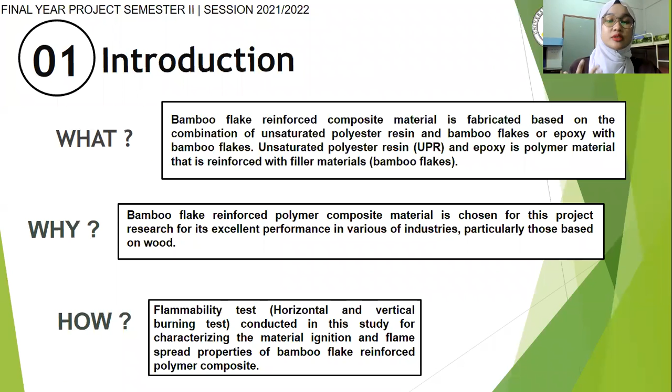Next is the problem statement. There is limited previous study as past researchers focused more on the mechanical property of this composite rather than the fire property. The second reason is to improve existing products such as oriented strand board, and for future work so that this study will become beneficial for other researchers.

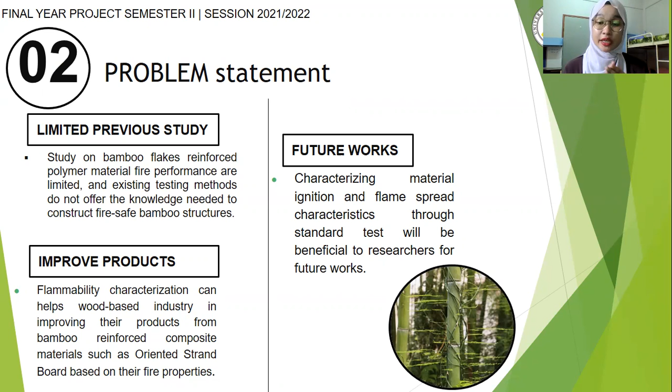Next, the objective. The main objective of this study is to characterize the bamboo flake reinforced polymer composite material ignition and flame spread property. This main objective is specified into three objectives: to design an experiment for characterizing the material ignition and flame spread property with ISO 3795 and American Standard Testing D635 as a reference.

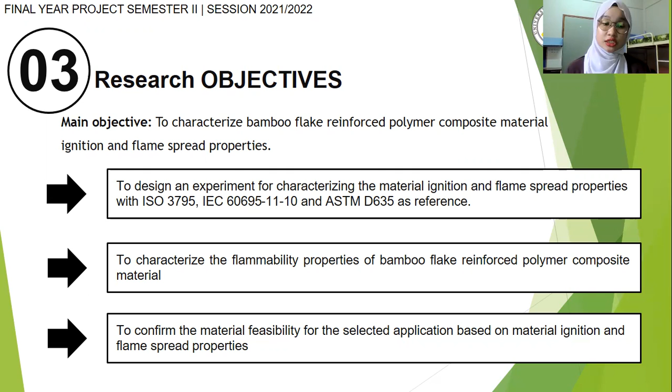The second objective is to characterize the flammability property of this bamboo flake reinforced polymer composite material. The third is to confirm the material feasibility for the selected application based on the material ignition and flame spread property.

Examples of results obtained from UL94 tests are flaming drops, combustion time, and combustion rate. From literature review we can also get the LOI value of UPR and epoxy. For UPR it is 21%, and for epoxy it is 20.2%.

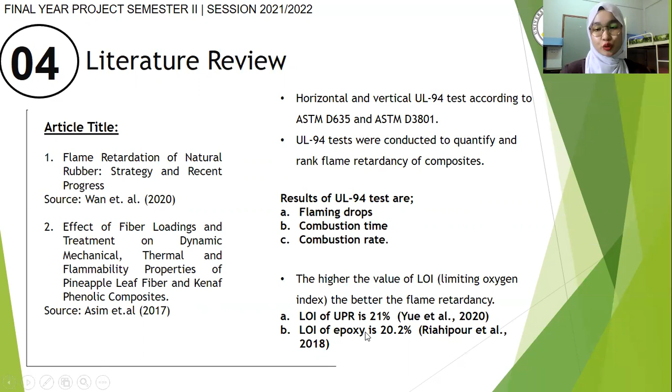ASTM D635 is the standard test method for determining the rate of burning and duration of burning for polymeric materials. ASTM D3801 presents a small-scale laboratory test utilizing a 20mm flame to determine the comparative burning characteristics of plastic materials.

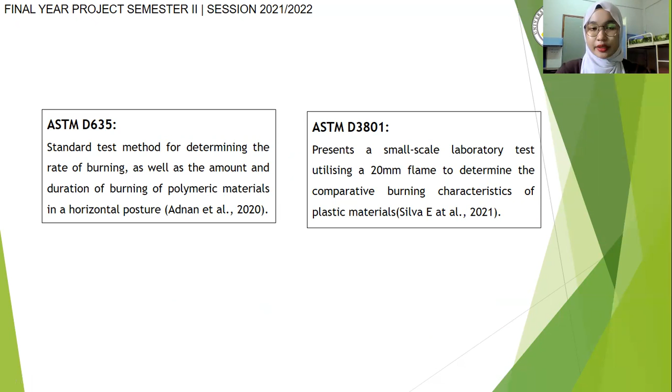Next is the methodology of the study. The study will start with specimen preparation of 5 different materials, which include composite materials such as UPR reinforced with bamboo flake and epoxy reinforced with bamboo flake.

As for the polymer materials, these are the pure matrix, polyester resin and epoxy resin. The fifth material is pure bamboo. After completing the specimen preparation, I will proceed to instrument preparation followed by flammability tests, horizontal and vertical burning tests. Once results such as ignition and flame spread are obtained, I will proceed to the next step.

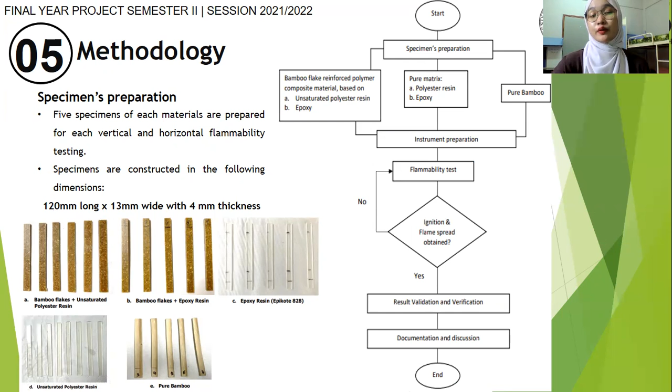This shows the 5 materials prepared with a dimension of 120mm long, 13mm wide, and 4mm thick. Next is the flammability test, which is designed and performed based on the American Standard Testing Method D635, ISO 3795, and UL94 standard.

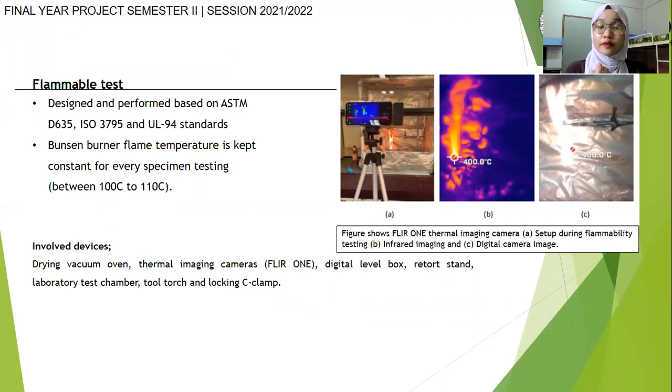The picture shows the FLIR ONE thermal imaging camera. A is the setup during flammability testing, B is the infrared imaging, and C is the digital camera image. The involved devices include a drying vacuum oven, FLIR ONE, digital level box, and more.

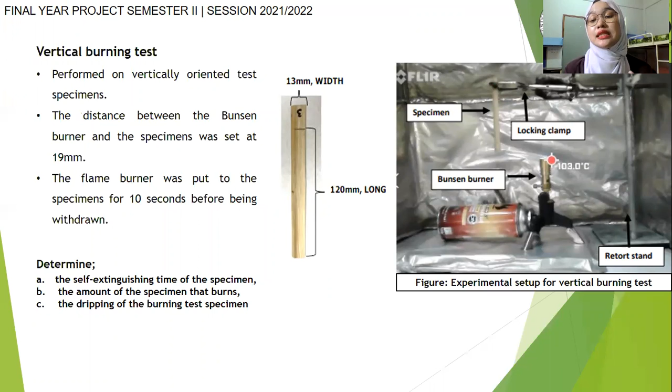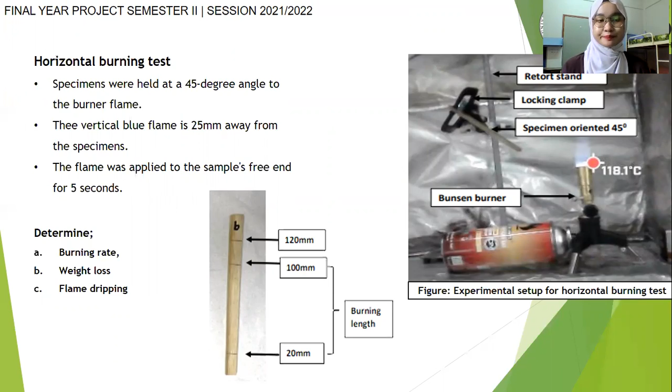As for the horizontal burning test, it is different: the specimen is held at a 45-degree angle to the burner flame, with the distance between the Bunsen burner and the specimen also 25mm away, and the flame applied to the specimen for only 5 seconds. The data collected through horizontal burning tests include burning rate, weight loss, and flame dripping. Next is result validation and verification.

As you can see here, for both vertical and horizontal burning tests for composite material UPR with bamboo flake, for the validation, COV is calculated for both flame time and burning rate. As for the verification, result verification is done through a comparison between the 5 different materials.

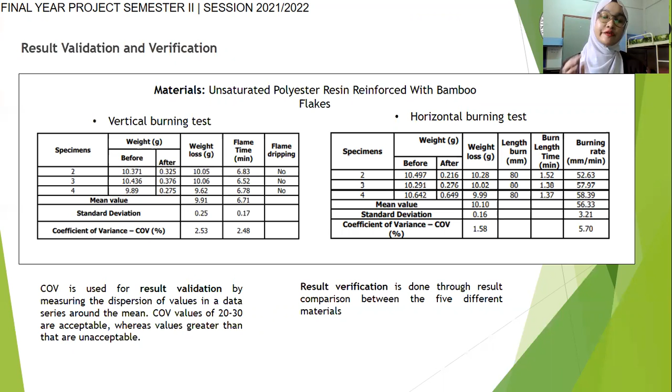Okay, next is the result and discussion.

Here shows the temperature profile during a vertical burning test of all 5 materials, which include epoxy, UPR, pure bamboo, bamboo flake with epoxy, and bamboo flake with UPR. As you can see, the temperature of both composite materials falls over time, and both composites have a lower temperature change over time. As for epoxy resin, when exposed to heat, because epoxy is made of BPA and epichlorohydrin, the epichlorohydrin will polymerize aggressively and quickly, resulting in a faster flame time of epoxy resin. As for UPR, it will release a substantial number of pyrolysis products when it's burned.

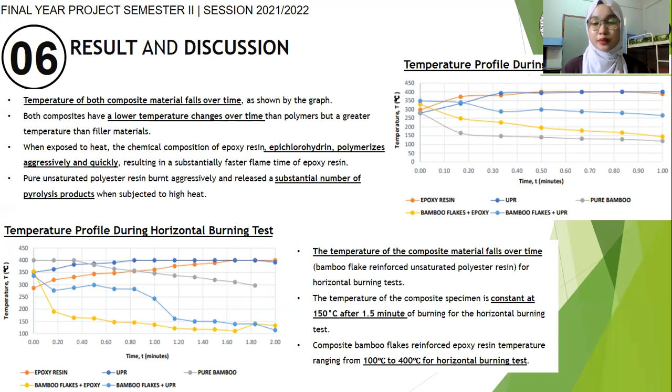Next, this is the flame behavior for composite material, which is bamboo flake with epoxy or bamboo flake with UPR for vertical burning test. As you can see, shown in the table is the early flame time of both composite materials and the temperature after 1 and 2 minutes of burning. Both composites show a decline in temperature over time, and neither of them show a melt pouring behavior when burned.

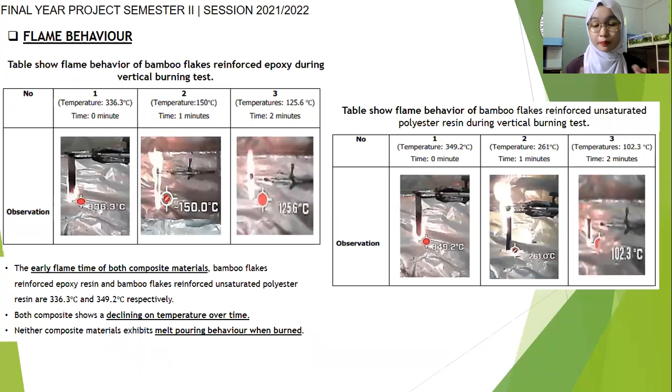Next, this is the flame behavior of polymer material, which is epoxy and UPR. The flame spread for epoxy resin travels slower than UPR, however both show a melt dripping behavior. As for UPR, the reason for its melt dripping behavior is because of polyester. The polyester in the UPR is heat sensitive, that is, when it experiences heat, it will melt, shrink, and deform. Melt dripping behavior is harmful in a fire as it will lead to secondary igniting.

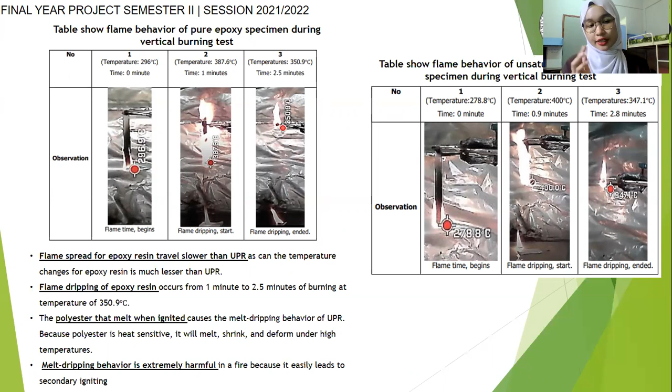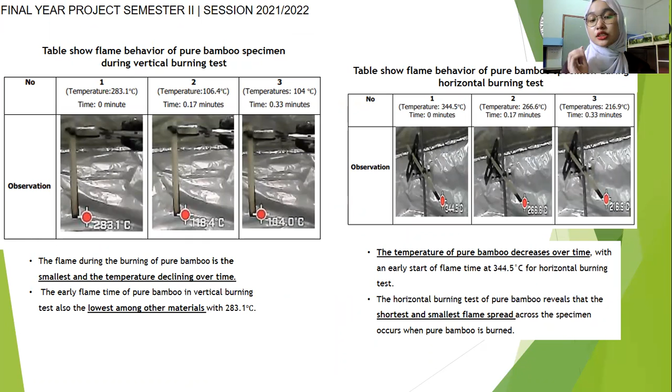Next, this is the pure bamboo flame behavior in vertical and horizontal burning tests. As you can see, in both tests, the flame time of pure bamboo is the lowest among the materials, and it also revealed that pure bamboo has the shortest and smallest flame spread.

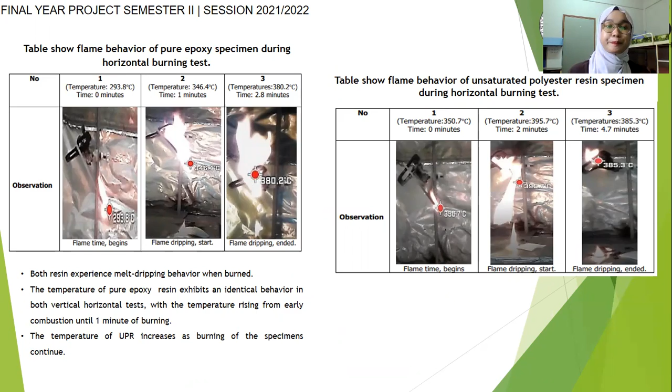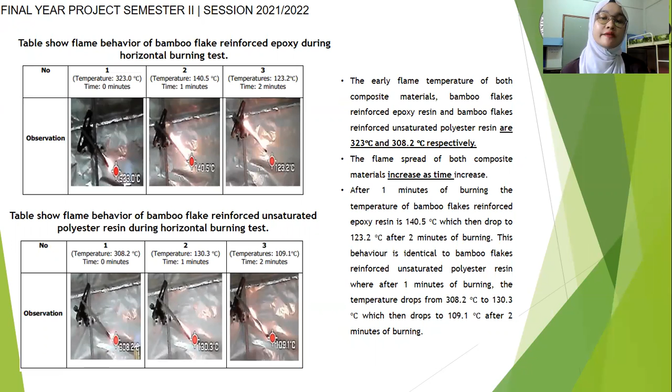As you can see here, this is the flame behavior of composite material, which is bamboo with epoxy and bamboo with UPR, which shows that the flame spread of both composite materials increases as time increases.

Pure bamboo has the lowest flame time because it has high organic silica concentration, therefore it has a short time. However, the condition inside the bamboo itself, which is porous, contributes to the burning.

Epoxy resin is made of chemicals that are not combustible or flammable and can endure temperatures up to 177 degrees Celsius, and its combustion time is lesser than UPR. The ability of UPR to continue burning is due to the reason that after the flame is removed, the styrene monomer contained inside the UPR itself, a flammable organic hydrocarbon, is burned because in the presence of oxygen, all hydrocarbons are burned. The flame period is significantly greater when the resin is strengthened with bamboo flake.

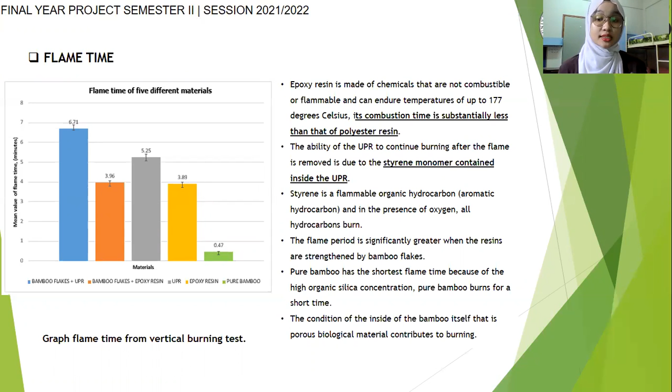As you can see from the table. Okay, move on to the burning rate.

As you can see there, pure bamboo has the highest burning rate, as for UPR has the lowest one. The high aromatic content of epoxy resin lessens the tendency of the material to ignite. As for the burning rate of UPR, it is faster because it is a flammable resin, and the difference in carbon content between epoxy and UPR is what explains the burning rate of each one of them, because the burning rate increases as the carbon chain length shortens. Therefore, pure bamboo, which has the longest carbon chain length of the 5 materials, has the longest burning rate, and moisture content also influences both flame time and burning rate of all specimens.

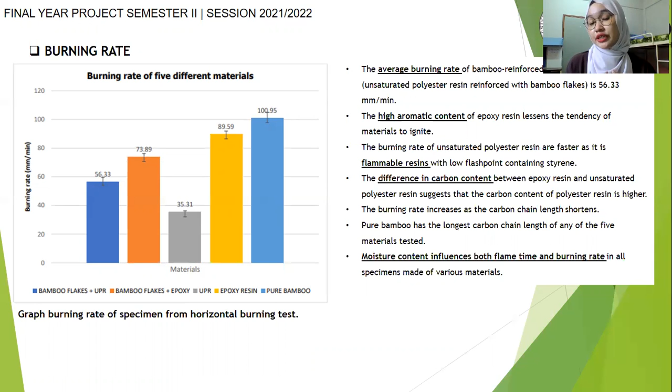Okay, move on to the conclusion.

The first objective is achieved by designing a vertical and horizontal burning test and specimen preparation according to the standards. The second objective is met by performing a vertical and horizontal burning test on the composite material in accordance with the specification, and the flammability properties are illustrated in a graph, table, and figure. As for the third objective, it is achieved as the burning rate of composite materials A and B, as you can see there, is lesser than the burning rate for laminate flooring and OSB board.

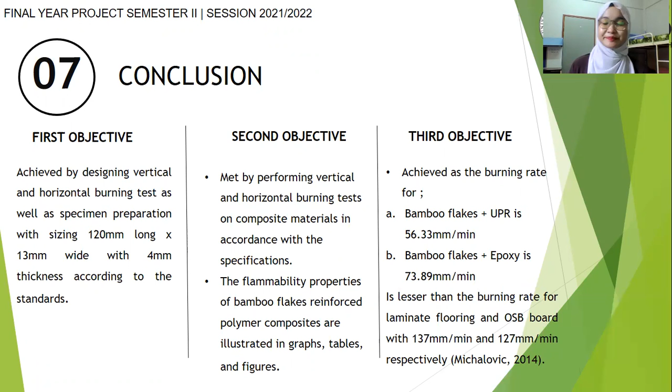Okay, next, the recommendations for this study: the first one is for large scale testing, the second one is for chemical treatment for moisture removal and lignin, and the third one is for adding flame retardant.